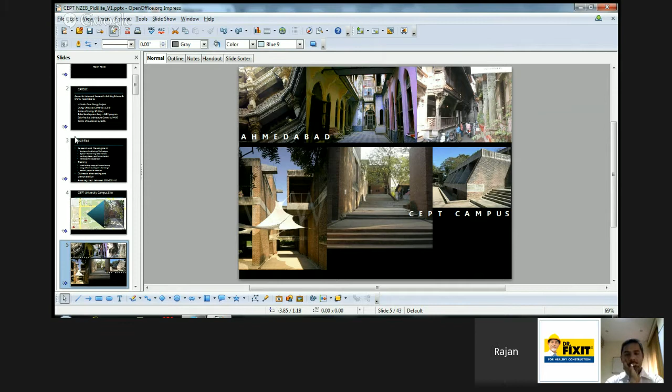Before we started, we said that we would like to have an international experience - not only calling those consultants and working with them, but we also had local consultants with whom we worked, and they helped us construct the entire building over a period of 3 years. So an international consultant came in the early part of the design, we did some conceptual planning with them, and with local consultants we did the detailed design and execution.

So I think most of you would be aware about what is net zero. Basically, you're trying to balance between your operational usage.

I'm getting a lot of background noise. I'm not sure whether you guys are getting background noise or not. Abdul, are you getting background noise? No, Rajan, there's nothing over here. Maybe. Okay, so I think I'm only getting the background noise.

Anyways, so the building which uses whatever amount of energy, if it can generate the same amount of energy over a period of 1 year, one can probably put that kind of building in a net zero building category, where your consumption and your generation on-site through renewable energy sources need to come together and match. To make a building net zero, you can't state that I have designed a net zero building. The correct way to state it is, I have operated my building in a net zero manner.

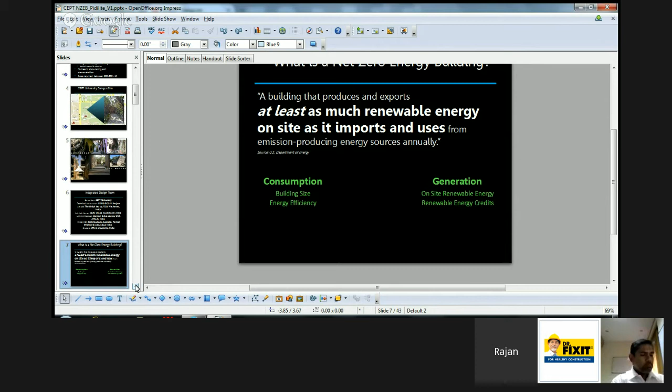So the exercise actually started with looking at the kind of exterior environment which we need to face, and the kind of interior environment which we need to have. If you see the psychrometric chart with the outdoor temperatures in Ahmedabad, you can see that we have very few hours available to us where you can be in a comfortable zone.

Again, I'm using the word adaptive thermal comfort, where what we're saying is that you don't maintain your buildings at 22 degrees plus or minus 1 across the year, but as human beings, we do interact with the outside. So if the outdoor is 44 or 45, you definitely will be more comfortable at 27 or 29, and you need not be at 22 degrees centigrade. And that means a lot of savings in energy.

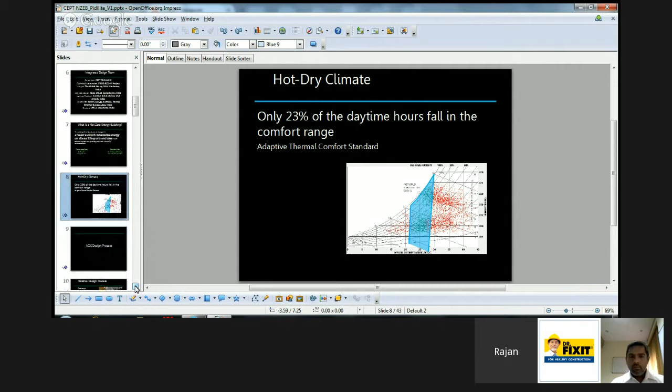The building design which we have done keeps the adaptive thermal comfort model, which we have developed in India for India, based on the adaptive thermal comfort standard of ASHRAE 55. The building is going to provide a comfortable situation as per Indian standards and not as per any European or US standards. So I'll go talk about the net zero design process now.

We started with charrettes, where 3 charrettes took place in person and around 20 virtual meetings with the consultants. This is an extremely important step where everybody from the contractor to the user and even the facility manager who is going to operate the building needs to be on board from day one. So along with the architects, structural consultants, and energy consultants or energy designers, you need to have people who are actually going to construct and operate the building.

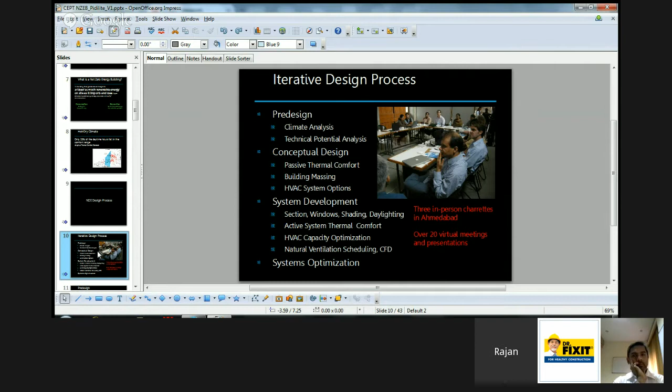So we started with that, the various priorities on our hand, and then we say, okay, if the building needs to be net zero, do we really need to have any kind of reference? How much do we use right now, and how much downsizing can we do? This is extremely important to understand. You can have a net zero building in its present state also without doing anything to your building.

For example, where I'm sitting right now, we might be using around 250 kilowatt hours per meter square, and I can make this net zero by putting a very large amount of solar PV panels somewhere on the rooftops. But that's not the case. You definitely need to downsize.

First, you need to downsize the demand. That is, you need to design your envelope in such a manner that it uses less energy, and then you put a very efficient system - when I say system, it's HVAC and lighting systems - so that you consume less energy. Now, whatever less energy you consume needs to get supplied by renewable sources. And that's how, in 3 stages, you need to size and design your building so that it can become net zero.

So we started looking at what happens on the CEPT campus. And as you can see, some of the buildings on CEPT campus use somewhere around 237 kilowatt hours per meter square per year.

We started downsizing ourselves, looking at heating, cooling, fan and pump energy, domestic hot water systems, lighting, and equipment to see how much we could downsize. We said probably we'll be able to achieve around 76% energy efficiency. With such heavy equipment load, we might be able to reach 58 kilowatt hours per meter square per year. That's how we started our next step of designing the buildings, setting targets before any sketch design.

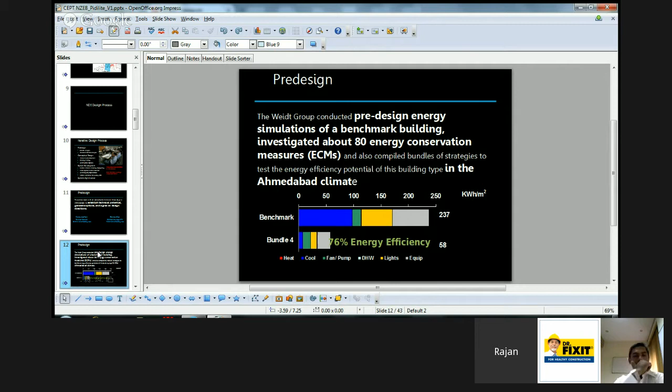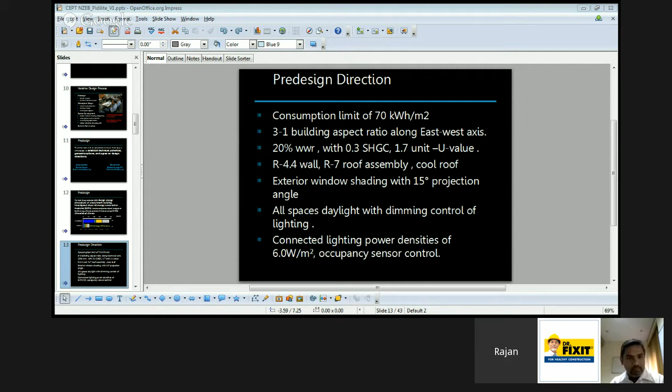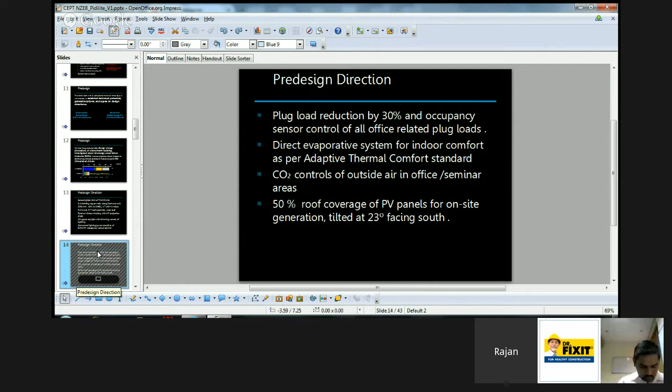These are the pre-design directions: what's the consumption limit, what's the shading potential we can have, what would be the connected lighting power density we should target (and that's very low), plug load reduction and how to really reduce the loads. Can we rely on direct evaporative cooling for certain times, and can we have CO2 controls for outdoor air getting into seminar rooms and offices? So various pre-design conditions were set, and we said let's start moving ahead.

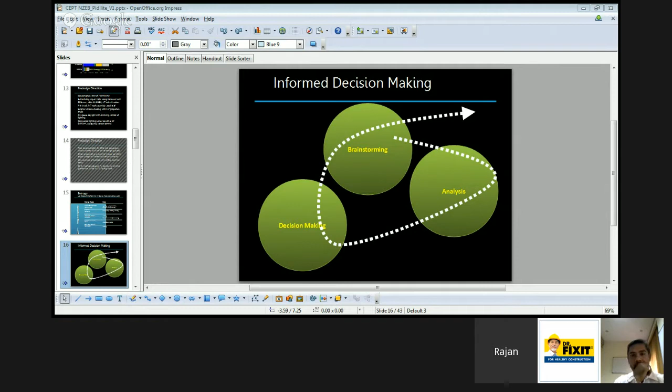What we said is let's try to use energy the way it gets in. If heat is getting in, do not try to change its form, straight away use that heat for some purpose. If light is coming, straight away start using that light, do not try to turn it into electric light and then use that. With design decision making, analysis, and brainstorming, I'll show you some examples of how we arrived at decisions.

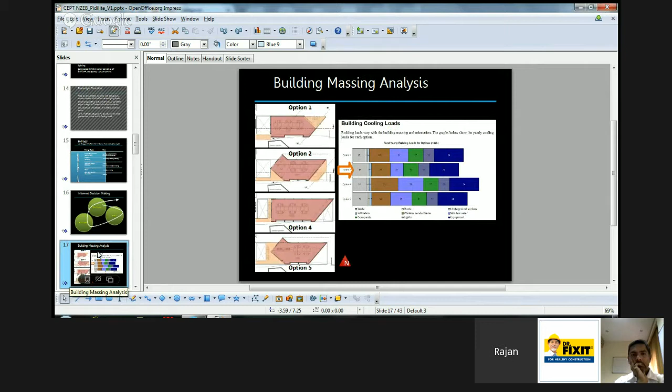With various design options, on the right hand side each design option got some kind of numbers. We started doing adaptive modeling to see how many times you can be comfortable without using any air conditioner or fans, and whether we can really improve that situation.

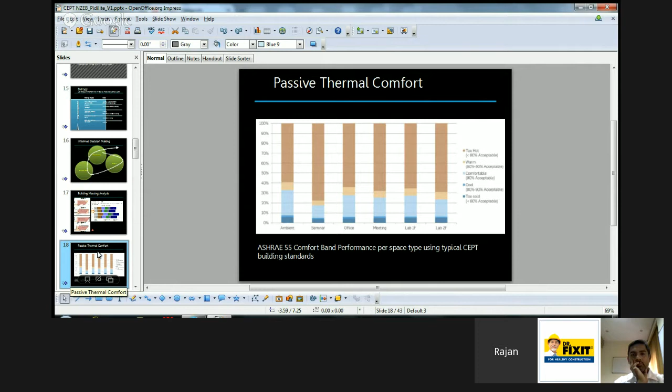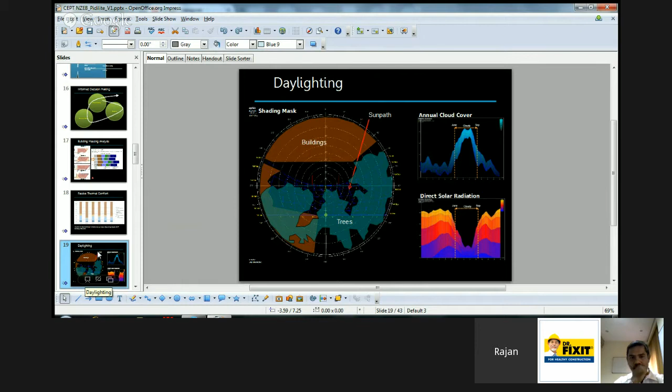It's an extensive shading analysis because that's what India needs. You might require a low U-value or a very good solar heat gain coefficient for the glass or windows, but the moment you start shading your building, you are much better off. You can shade your building with surrounding buildings, or with trees. So shading analysis becomes very important at the early design stage.

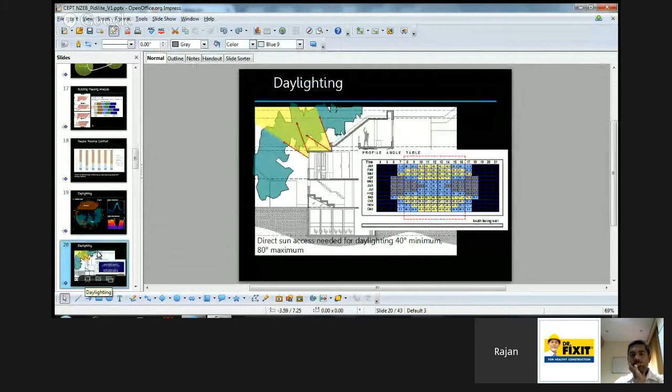Some of the daylighting analysis we've done looked at the kind of exposure you need with the sky, so we started providing certain clerestories. These are the daylight analysis areas we focused on.

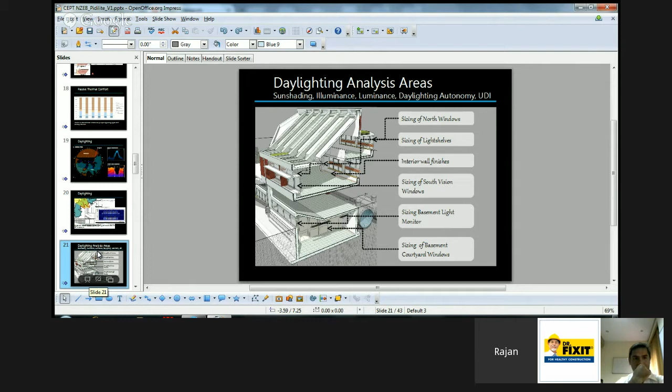Fully glazed on the northern side, with careful sizing of light shelves - whether you should have 500, 600, what height, what interior wall finishes, what about the south facade and vision windows - because it's not that you just avoid windows, people would like to see outside. If you provide vision windows at a certain level with good shading, it definitely helps. When you get into the basement, how do you bring light deeper inside the floor space? Do you need geometrical characterization or modulation in your floors? That's how we started looking at daylight.

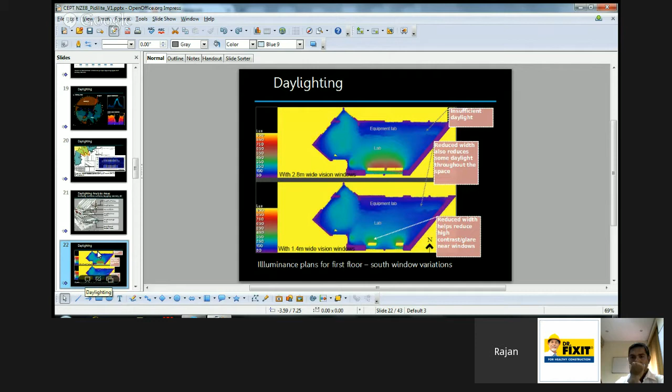We did extensive analysis, not only visuals but numerical analysis too. These are some screenshots from the Radiance model, looking at the width of the windows - how much can we have, how much can we not have.

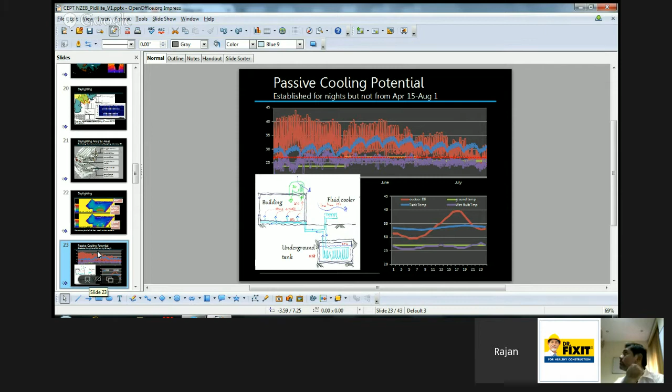Again, looking at passive cooling potential - Ahmedabad does not offer much except for thermal mass. Whatever happens outside, even once you start operating your building in natural ventilation, what's happening outside will come inside after 3 or 4 hours. So looking at the temperature, looking at ground temperatures, and if you need underground water tanks, can you take advantage of the cool water that gets stored and look into some of the cooling systems.

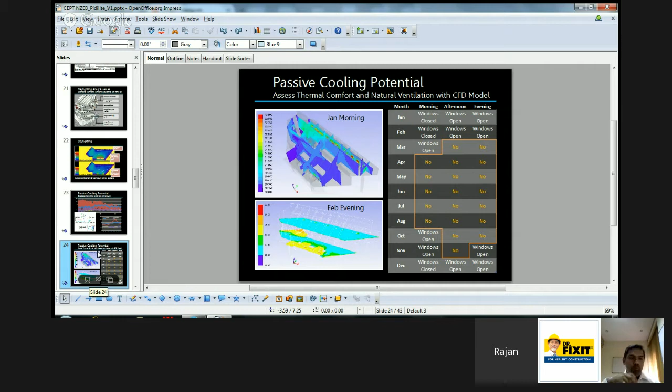Because we are going to rely more on natural ventilation and thermal comfort, it's extremely important to look at computational fluid dynamics analysis, not only for temperature and relative humidity, but also indoor air quality. Because if you're in the middle of an urban area and don't get good outdoor air quality, it doesn't make sense to make a naturally ventilated building. So we did that analysis.

We did a lot of cost optimization, looking at labor cost, material cost, and operational cost. We said that through various permutations and combinations, we may be able to hit our targets.

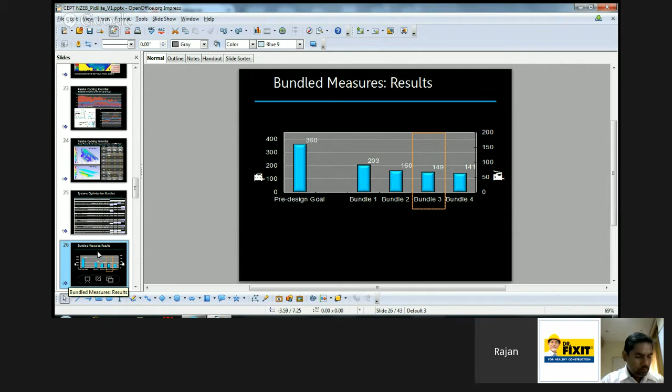We call it a bundle approach, and probably bundle 3 is probably cost effective while giving us a maximum amount of energy savings.

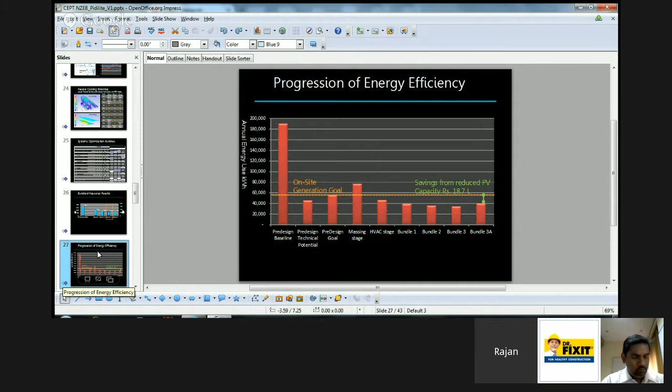Once we had that, we said let's start looking at the solar PV potential, because right now the site doesn't offer anything other than solar PV. We did look at biomass, we did look at solar thermal, but the size of the building is such that probably solar PV is the only option one can look at. So we started looking at what the capital investment would be if one has to put in solar PV, and what would be the sort of generation.

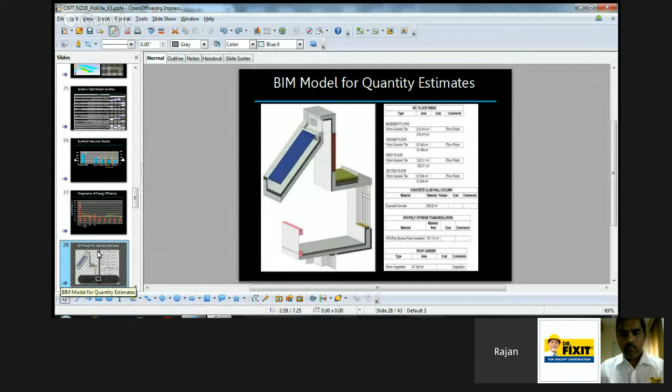On the academic side, we relied completely on building information models, because that's what our research area is also, where we are trying to combine a building information model with monitoring systems. These are some shots where you can actually see conflicts resolved between various services, and you start looking at the building in a virtual format as it gets built.

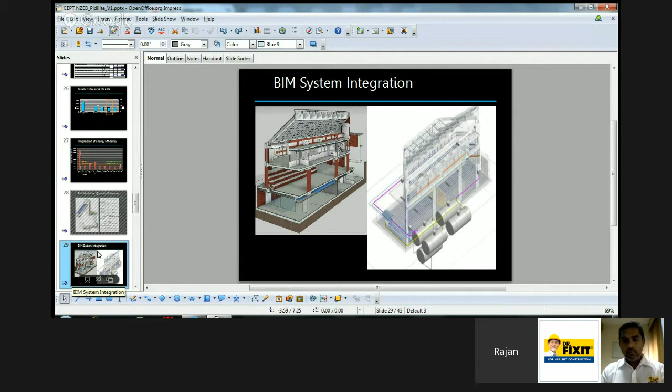So what did we design? We designed basically good daylighting systems, vision, clerestory, light shelves. We designed the stack effect to allow the solar chimney for natural ventilation. We did design a ground heat exchange by putting some of the seminar areas in the basement. We optimized the envelope heavily, relied on a low LPD, around 4.7 watt per meter square, and in some areas requiring exhibition space we started relying on radiant cooling.

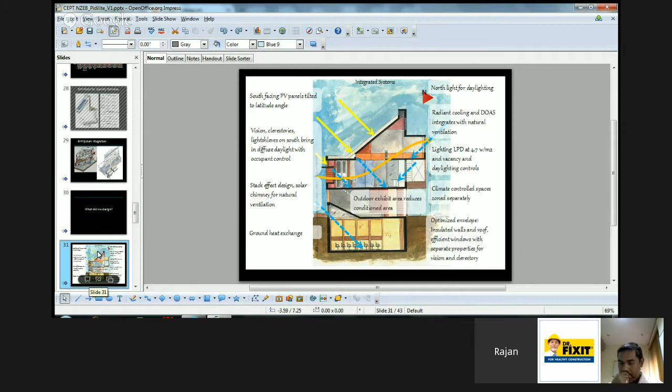And so that's the kind of building which has come up. The building itself is a living laboratory for us; we'll be experimenting with the building itself. We have put in around 900 sensors across the buildings to monitor various end uses and environmental parameters of the building.

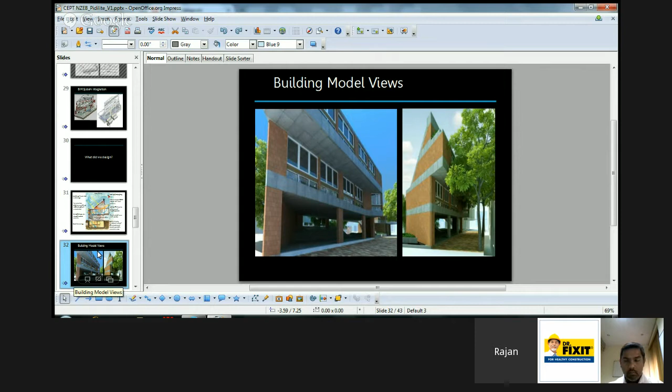That's how it looks from other sides. The feature is that with daylight autonomy, we are getting around 90% of the spaces completely daylit. Window to wall ratio is around 19 to 20%, and still we are getting full daylight. And then there's a lot of optimization on building systems and HVAC systems.

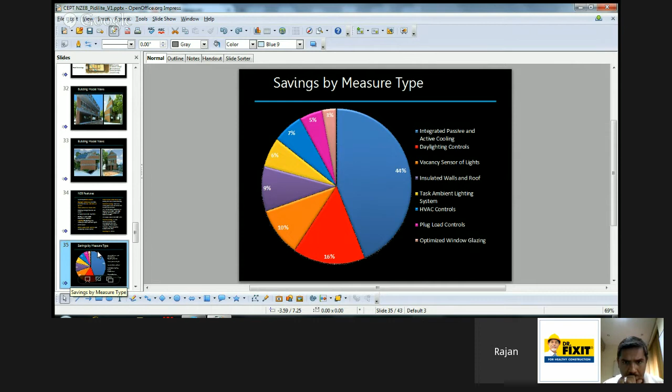This is how our savings break down by measure. Around 44% savings are coming basically from integrated passive and active cooling systems, and another 16% is coming from daylighting controls, vacancy sensors, insulated walls and roofs, and plug loads. So these are the sort of envisaged savings by measure.

What we learned is that iterative analysis and design commitment for a performance-driven solution got us there with low added cost. Being an academic environment, we were extremely conscious about having the cost factor in the design and construction all the time. Use energy in the form it is in.

If you're getting daylight, start using that. If you're getting heat, or if you're getting nighttime ventilation with outdoor air at a lower temperature, start using that in its own form.

Net zero architecture focuses on daylighting, passive cooling, and responding with active systems also, not only relying on passive systems. When you want to increase the productivity of people, you definitely would love to rely on active systems, primarily in areas where Ahmedabad is.

There's no silver bullet. Every kilowatt hour counts. It's not a golden rule that you have to design a building in an XYZ format. Each building is unique and requires enough rigor before you start looking at any kind of numbers.

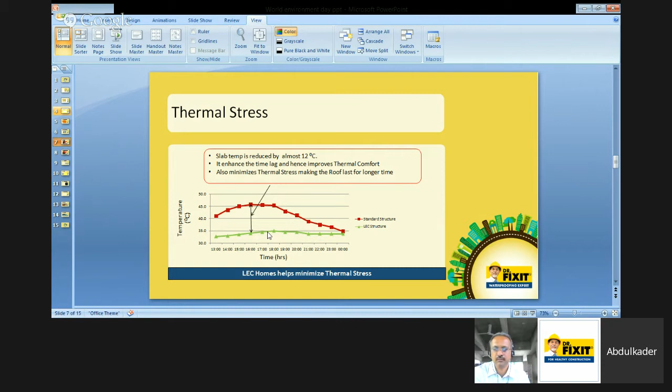It's very important for us to be comfortable, and again, like Rajan said, it's important to look at our own way of comfort and not what is applicable in the US or other parts of the world.

Whereas what we found is by using an insulated structure, the entire temperature is much more comfortable - this is denoted by the green line. Temperature is still higher, but the temperature of a conventional building is much higher. An insulated structure is much cooler.

Now there are different strategies of insulating a structure. What I'm going to be talking about is one of these strategies. You can insulate a structure with different ways, different materials, different systems.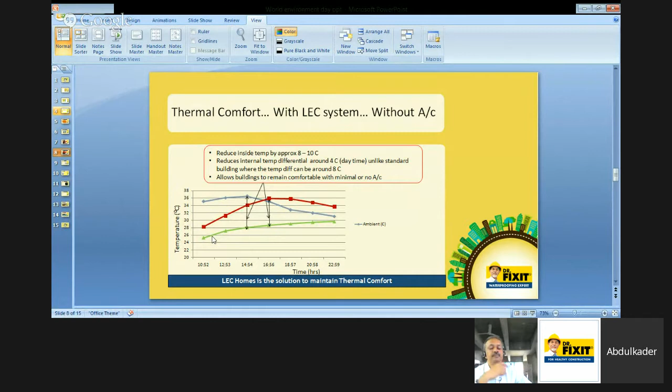The system which we have launched is working very well, and we have been able to demonstrate a lot of savings. It's a green, spray-applied system which goes on the roof. It's sustainable and gives permanent weatherproofing, to the extent that Dr. Fixit offers waterproofing guarantees of 25 years, 2.5 times what the conventional market talks about, precisely because we believe the system will last long enough to work.

As a system, this would reduce heat by 80 to 90%, save energy, and help in faster completion. As I said before, the system is executed and the guarantee is offered by Pidilite.

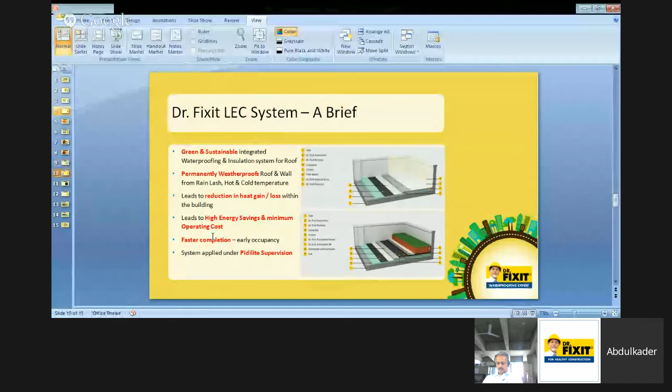This system has been very well used. I'll be happy to share a case study of a project in Ahmedabad — a prestigious hotel which is a green building. They were earlier looking at conventional systems, but had a challenge since the roof had multiple pedestals and MEP systems on top of it, so they wanted something that would work well while saving a lot of energy.

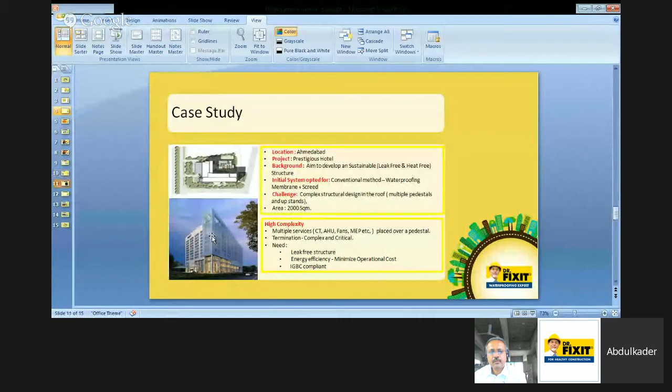After a lot of permutations and analysis, with rigor in the selection process, they chose the Dr. Fixit LEC system, which was proven through figures to help save 82% of the heat and close to 30 tons of AC. The payback compared to a conventional system was immediate. Over the life cycle, they could save around 2.2 crores of pure benefit, with a 25-year guarantee from Dr. Fixit and Pidilite, compared to a conventional system.

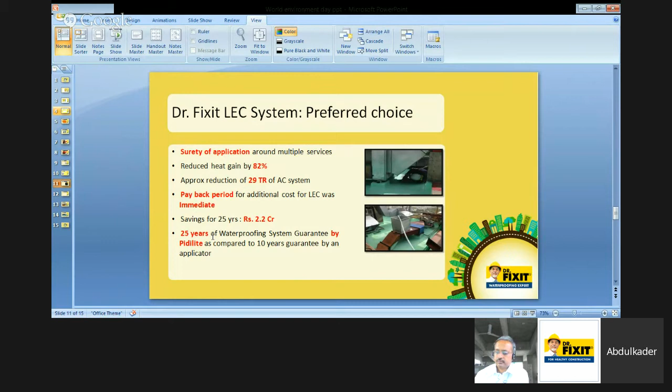So what Professor Rajan said about downsizing — there are technologies and systems being used. What we're recommending on World Environment Day is our bit to give back to the environment. I'm sure you're aware of stats showing that in the next 20 to 30 years, we will see 3 more Indias coming in. If we have so much construction, it's important to design it correctly and downsize the demand so needs can be maintained.

I'd like to conclude by saying it's important for us to be the change we want to see in the world. Each one of us can make a difference, because none of us would want to live in an environment without water, without electricity, without a good way of living — because we all want our children to be happy, and we all want to live in a green, sustainable environment.